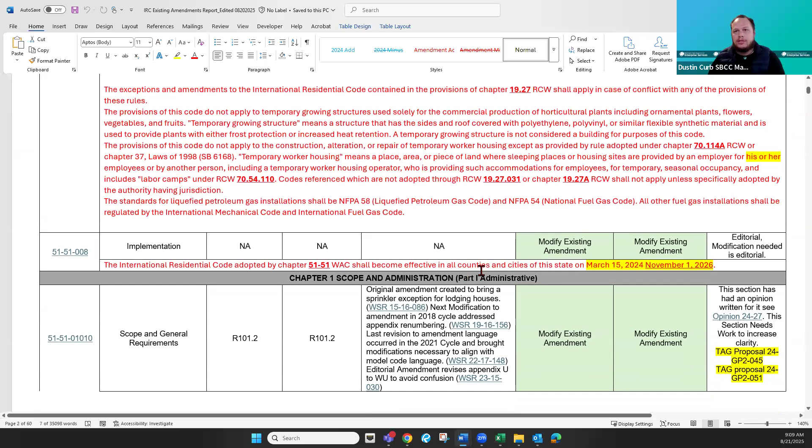I've also tried to go through and make sure that these aren't breaking across the pages. This is a section that didn't quite work out on that one, but I've tried to get that. There might be a lot of white spaces in here as we try to keep things together on these pages, and it looks like stuff I've done on this one down lower has messed it up above. So I will try to clean that up a little bit more when we finalize this.

Getting to section 101.2, we have two tag proposals on this one. One is to clarify that section 2904, and then we have another tag proposal looking at the exceptions for section 101.2. We have a lot of discussion on the daycare.

Our state amendment actually mainly lies right here in number 3, and all the rest of these are model code language sections that have some state amendment to them, but we have some discussion on this number 6. So the other proposal is going to really address the daycare facility exception there.

And at any point, if anybody—I don't have the hands right in front of me—but if you have anything you'd like to say, just speak on up. I'm happy to pause. We get to 102.5.

In this one, we have the tag proposal 045, which is again the number, or section 2904 proposal.

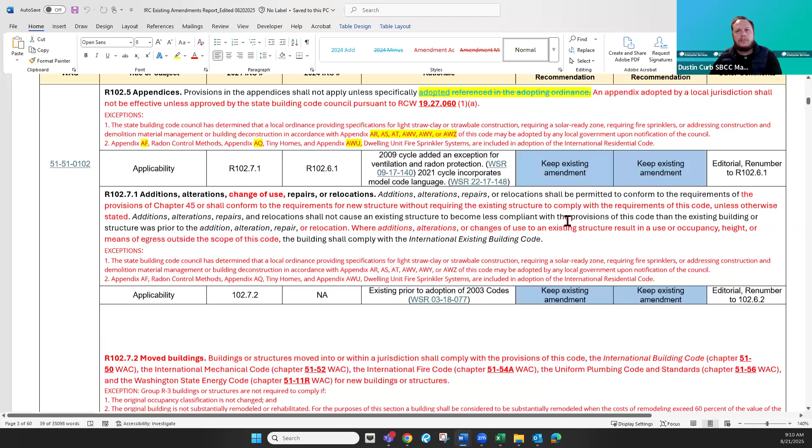For this section, we have a recommendation to repeal the amendment for egress roof access window that's contained in the proposal for number 046, which is addressing sleeping lofts versus lofts.

And the model code has moved to sleeping lofts, and the discussion is to maintain just loft language in Washington. Similar for the definition of landing platform, we have the proposal 046 in there, and the definition for loft.

We'll see this one pop up again in the significant changes report, modifying the definition or striking the definition of sleeping loft to go back to what we have currently here with a little bit of an update.

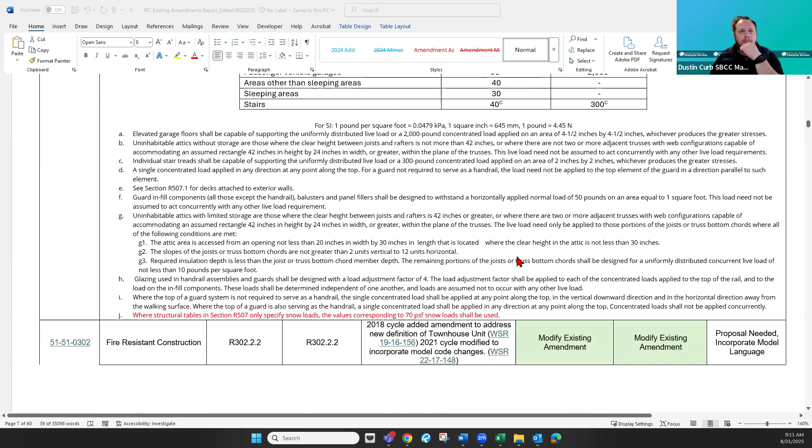And we have two-family dwellings. We have a separate proposal for that to kind of clarify how this one breaks into some new sections in the 2024 model code. So we have proposal 047 coming in for that one.

And that's relevant to all of section 302.3. They have a new big section in there.

And even though we're not proposing any changes on 302.34 with the proposal, since it's relevant to the topic, I've just got it listed in here because the section is included in the text of the proposal, even though there's no change proposed.

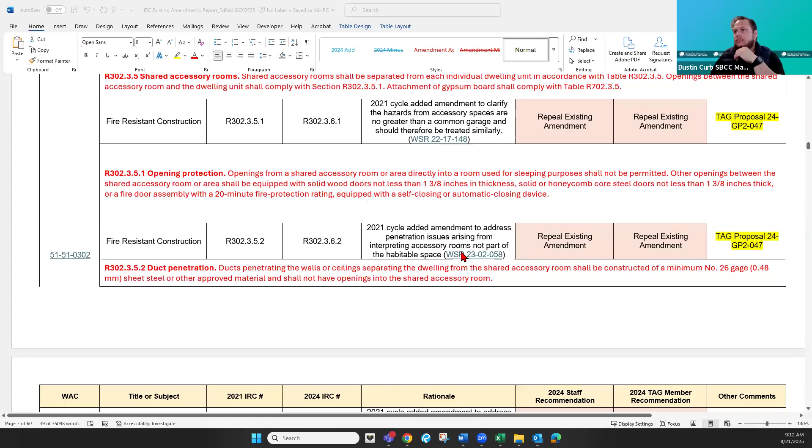This one is 045. This is related to the section 2904 proposal, mainly just cleaning up some stuff in here with the reference to the appendix and referencing correct sections for this section.

And this one, natural light, had a big revision in the 2024 model code, and our state amendment needed some work on that one to make it line up and keep the content while also aligning with the new model code language. So proposal 044 is the one we have slotted in for that one, and it's relevant to all of section 325 in the 2024 code.

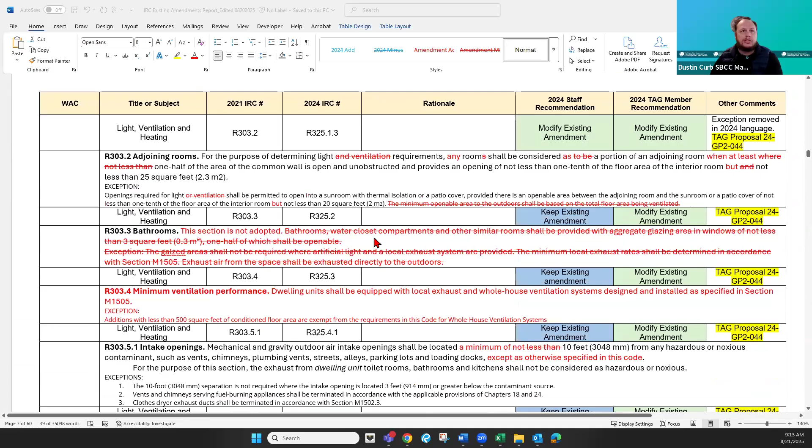And it's listed in here for all of the sections 303 in the 21 code existing amendments.

All right, for garages and carports, we have proposal 049, which is expected for the electric vehicle charging infrastructure components of these sections. So we have that one slotted in here.

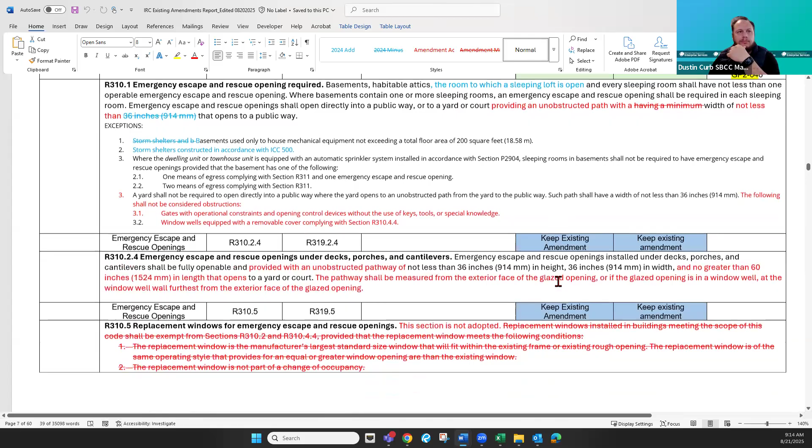The emergency escape and rescue openings, 046, is relevant to the sleeping lofts we were talking about earlier. Same for guards and window fall protection, we have 046 dealing with the sleeping lofts.

Same here for the smoke alarms and heat detection location section.

For this one, solar, let me just make sure I remember specifically what all's in 038. Give me two moments here. But that is a tag proposal. Number 038 - oh sorry, we have that one came in from the public, but I wanted to make sure I noted it here.

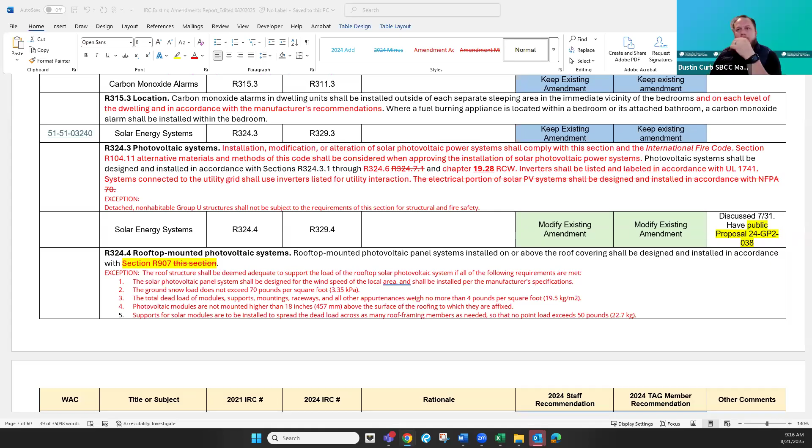We had some discussion on this one, so it's not a tag proposal highlighted there, and I didn't go through and highlight all the places where we have public proposals for existing amendments. That one was discussed at our last meeting briefly, and it was on my mind when I highlighted that.

John, go ahead. Just wanting to see if we're going to be discussing that today, and should we have our folks on here that can speak to it?

Don't anticipate having any robust discussion on the proposals today. The main goal of today is to move this report we're reviewing across the finish line, and then the significant changes report, we try to move that one as close to the finish line as possible. So as far as making or taking any action on the proposals today, that's not anticipated.

The reason I have the proposal list on there for other business is just to touch it if we see anything we need to address before next week's meetings. Gotcha, thanks Dustin. No problem, John. Thank you.

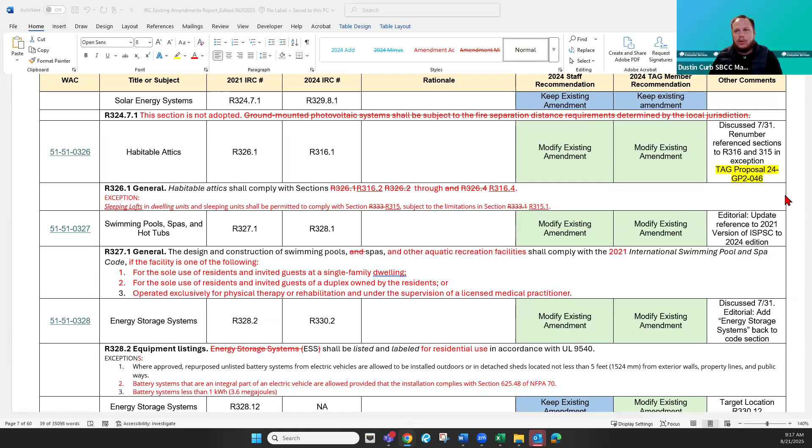This 046 is for the sleeping lofts in habitable attics. We have our sleeping loft section, so proposal 046 will be applicable to all of these sections, and IRC 2021-333 and section 315 in the 2024 code.

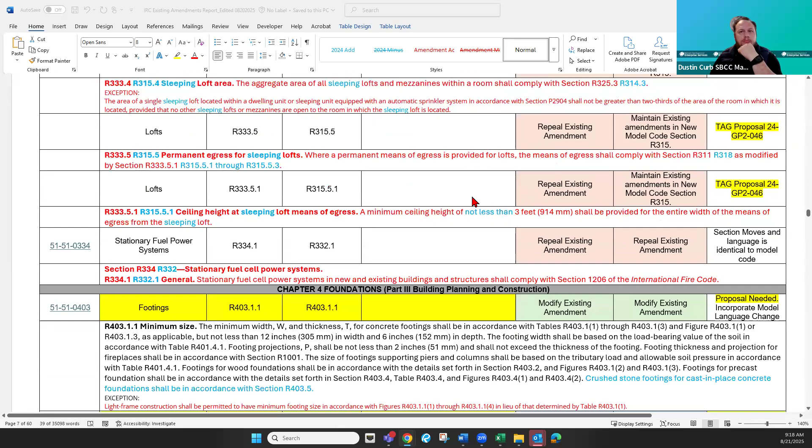So getting here, these are the highlighted blocks that I had marked for additional discussion. Let me go back here.

So this is the section, I think, Josh, that you said there were some issues that you guys were discussing or had some issues with in your work over the last weeks. The notes I had on here...

...was to incorporate the model code language, and a proposal's needed to do that to our state amendment. I'm happy to write that because it's fairly editorial, and I think it also reduces costs based on the information provided from ICC on the change there. It allows a little bit more flexibility in what goes on underneath the footings.

And I wanted to pause and talk about this section - if we can write a proposal, or I'm happy to write a proposal to propose adding crushed stone footings for cast in place concrete. Any thoughts on that? Josh, go ahead.

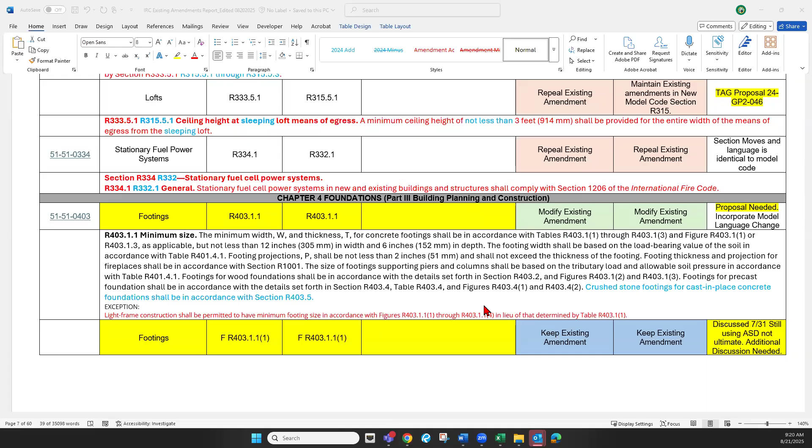I think it makes perfect sense to incorporate the model language, and the portion I was talking about is actually the very next one, 403.1.1 parentheses one. Okay, but I would be happy to write a proposal if no one else can. It seems pretty straightforward. Gotcha.

I'm going to unhighlight this one, and I'll write a proposal for this to incorporate the model code language. I'll be using economic data that comes from ICC. There's not a ton in their CDP access stuff, but what is there, I'll bring into the proposal and add to the bottom of our list.

Go ahead, Patrick. Yeah Dustin, you mentioned economic data - would this have an economic impact? According to what was viewed on the ICC code development access information, the addition of bringing in crushed stone footings...

...will reduce construction costs because it adds a lower cost option for certain scenarios. So it's not adding cost, it's reducing, but the information in those proposal documents for ICC is what I would intend to bring to this one.

And they don't have any specific real numbers, just a kind of statement of what's going on, but I'll sift through that one and bring it forward.

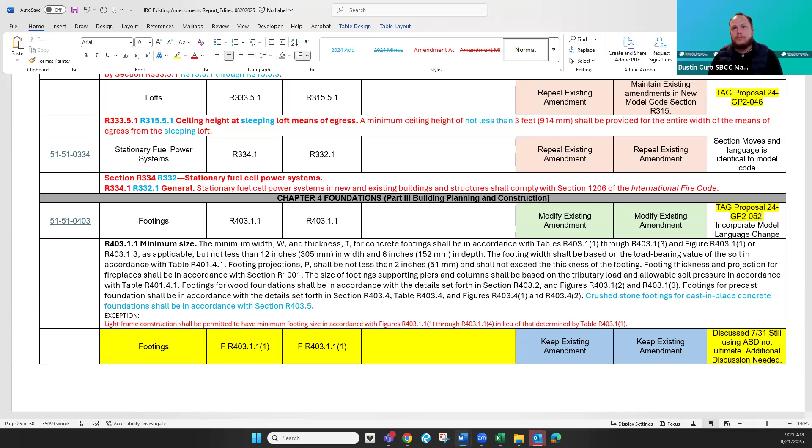Alrighty, so this one - any of these other ones highlighted in chapter 4, which is pretty much, I got chapter 4 and chapter 5 stuff that I had notated for additional discussion, primarily focusing on if there's any snow loading changes that need to happen here.

The question I had in my notes was, is this still using the ASD versus the ultimate design? Looking back into chapter 3 of the 2024 IRC, they're still using the ASD design. So I just have these highlighted as they had potential snow loading issues, and I wanted to make sure we don't need anything additional in these sections as we move forward.

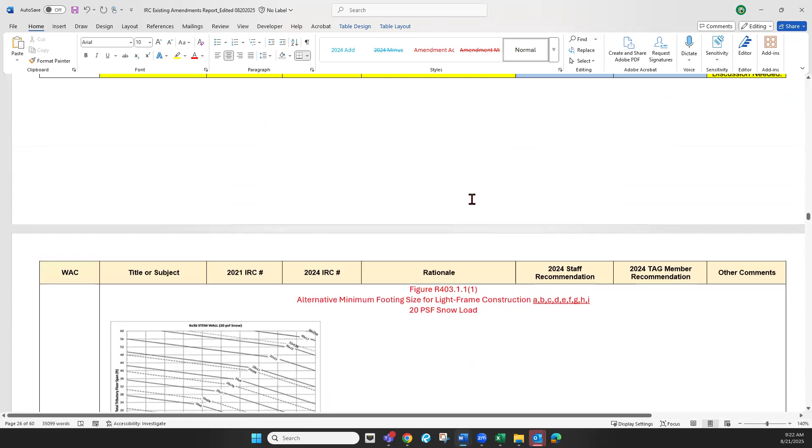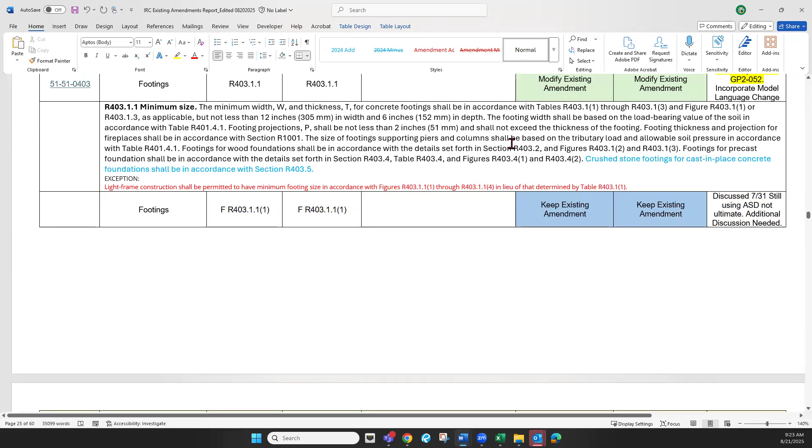So, Josh, you said we might need to look at these figures below a little bit. Yeah, as it relates to the ASD and LRFD, I concur with you. I don't think there's anything we need to do because the IRC is still using ASD loads. It has language about the conversion, and we wanted to wait till we saw some of these other proposals. We did see some from SEAW, and they were adding clarification to the table, giving us more options, not trying to move away from an ASD snow approach. So everything is still proposed and adopted as ASD snow. I think we're plenty good there, unless others have other thoughts.

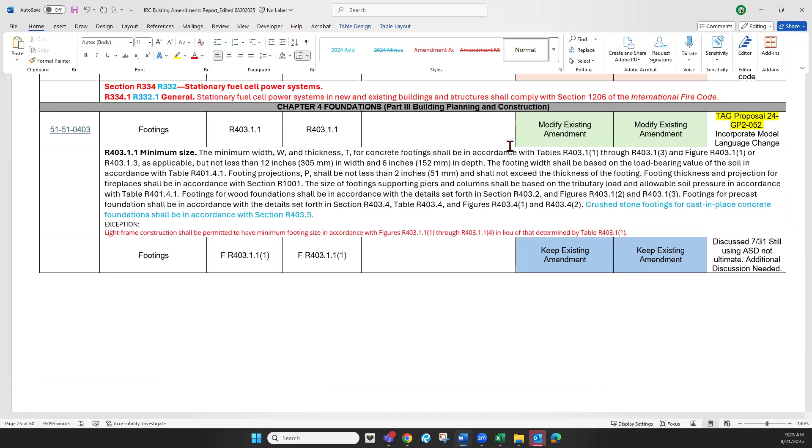My comment actually came up this morning on a project relates to the terminology we use. It says tributary span in the table, and this is a table replacing a table from the IRC, or an acceptable exception. But the table in the IRC uses full span of the building, or building width. In typical engineering terms, it's much more common to hear tributary width as opposed to tributary span - it can be interpreted two different directions. Based on back figuring the numbers, they were looking at tributary width, not tributary span. If somebody were to misinterpret this, they would be very conservative.

So it's not an urgent issue, but it was brought to my attention and there was some confusion about it. I back figured the numbers, and I do see where confusion can come up with that terminology, especially considering the table it's replacing. I'm hoping maybe somebody on the call happened to be involved in this at some point. I'd love to hear if there's anything else I'm missing, but it seems pretty cut and dry to me that the intent was a tributary width, or half of the span, not a tributary span. Does anyone else see that as an issue, or am I just odd?

Or are there other structural folks on the call today, or maybe I'm the only one?

So just so I'm tracking, it's just changing span to width, and the tributary width is similar to span, but not the same thing. I'm hearing the difference there, but what is the misconception that happens when someone uses width versus span? So the tributary width is half of a span. I've never heard the term tributary span before - that seems like almost an oxymoron. You're either a span or you're the tributary width, not a tributary span.

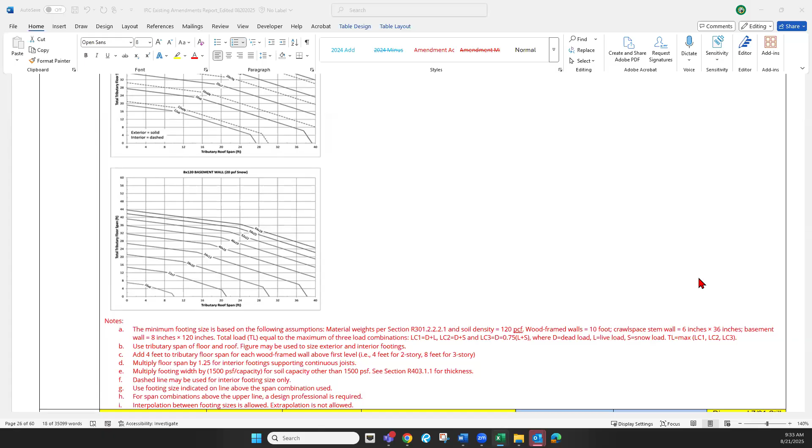My hope was that we could approve the report today, but I guess we have this and then that other proposal that Dustin mentioned. Is it possible we could tag the proposal as TBD and approve or take a vote on the report today, and then when we have proposal numbers for those, if they get it by tomorrow, we can get numbers for them?

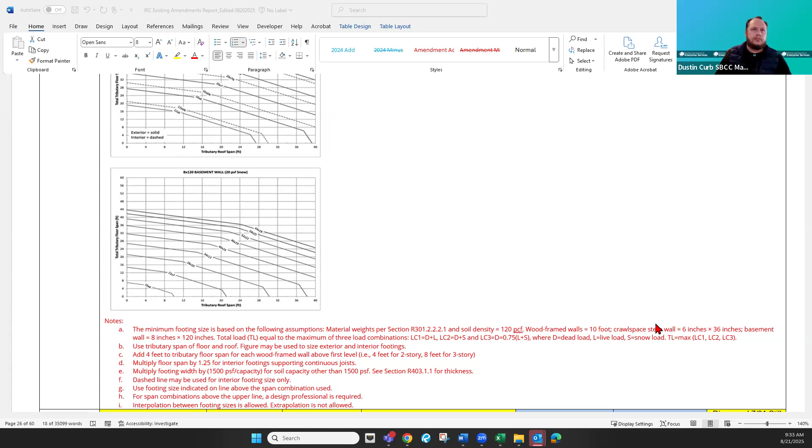So my thought is I'm prepared to pop a proposal number into this right now, as you saw me do on the one above earlier. And I can do another one for this one as well. Sounds good. Okay.

Moving on. So everything highlighted in here moving forward is just the snow discussion. Josh, is the proposal you'll be looking at going to cover all of these 403.1.1 figures? Yes. Okay.

And the whole ASD, LRFD snow thing is no longer something we need to hang on to now that we've seen all the other proposals. Okay.

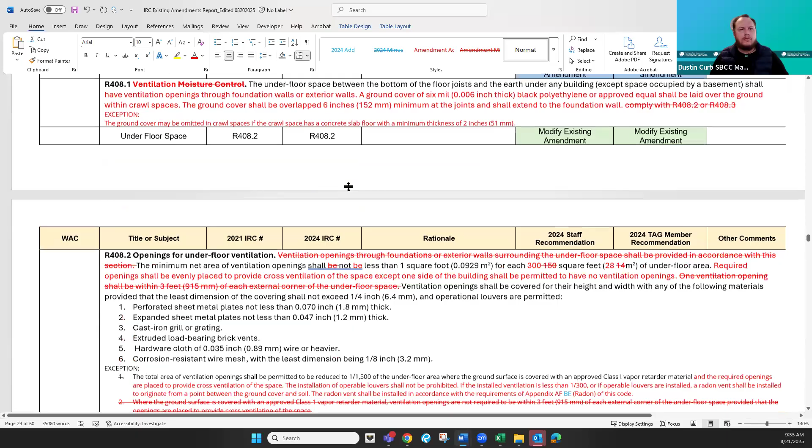Moving out of the 403.1.1, the next stuff I have here as far as additional discussion is in 507 for similar stuff. Would we say that I just have it on here, that it may need to be visited due to snow load revision? Still, I guess the sentiment I'm hearing now is that it's no longer an issue.

That's correct, because the tables still give you an ASD snow load. The snow loads may change in some locations, but the tables still give us the right values. And because we aren't doing anything to change the IRC values to LRFD, those tables are still valid. Gotcha.

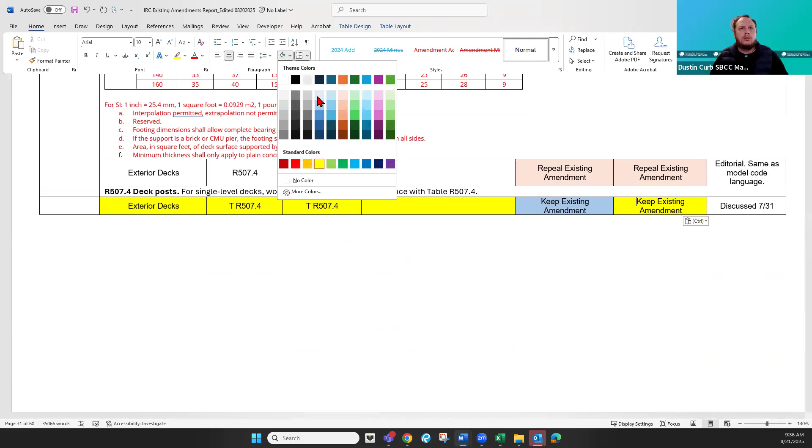Same on this one. This is the last one. Thanks for setting those aside, Dustin. Sorry to make you do so much editing. It's okay.

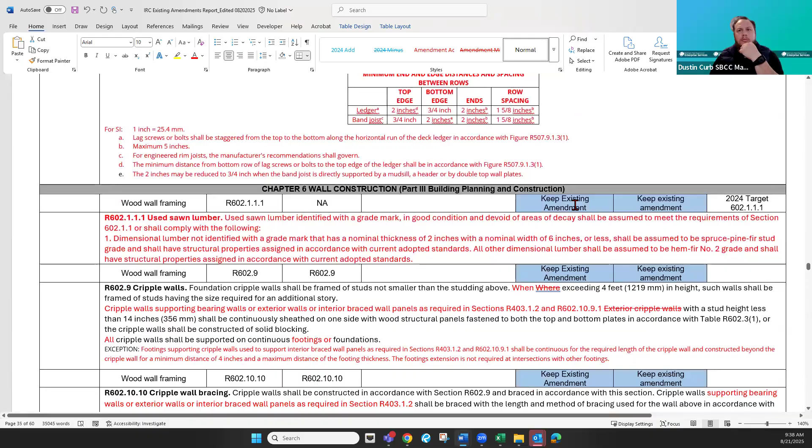All right, moving forward. I think there's a lot of just scrolling through the middle of the report. This one,

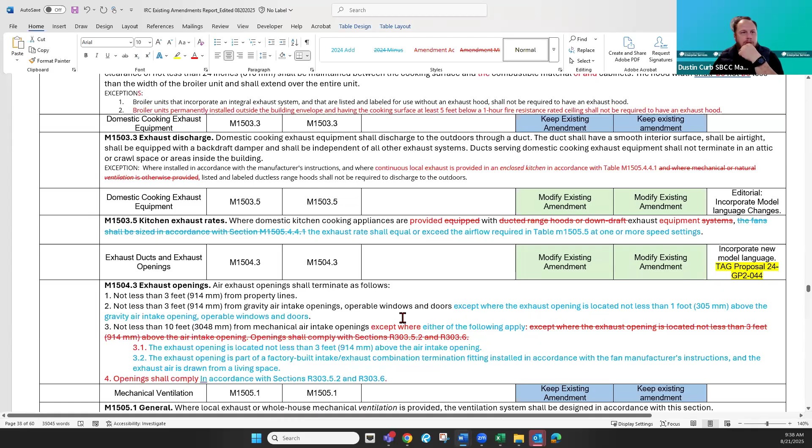M1504.3, 24-GP2-044, is on the ventilation and heating. I don't think they're actually proposing any changes in this section, just that it could be relevant here. So I have it in there because it's in the content of the document we were looking at. I don't have the official proposal for that one just yet.

This is the 2904.1.1. So we have a proposal on that one.

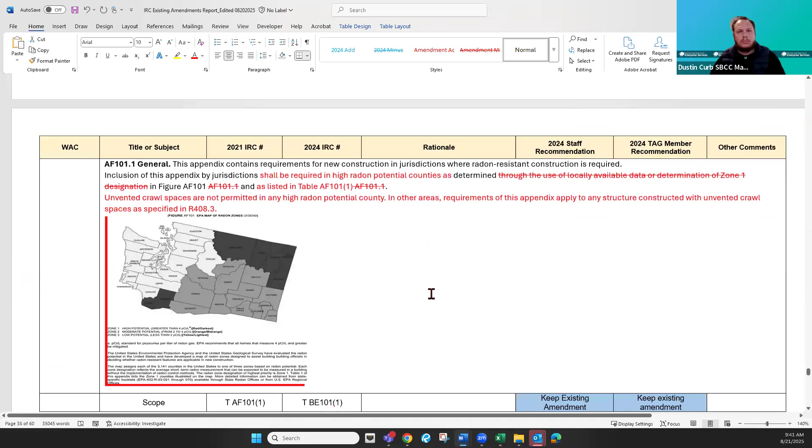We get to the appendix on tiny houses. We have a separate proposal. This kind of goes hand in hand with the sleeping loft topic, but we're going to be looking for a separate proposal on appendix BB for the 2024 code.

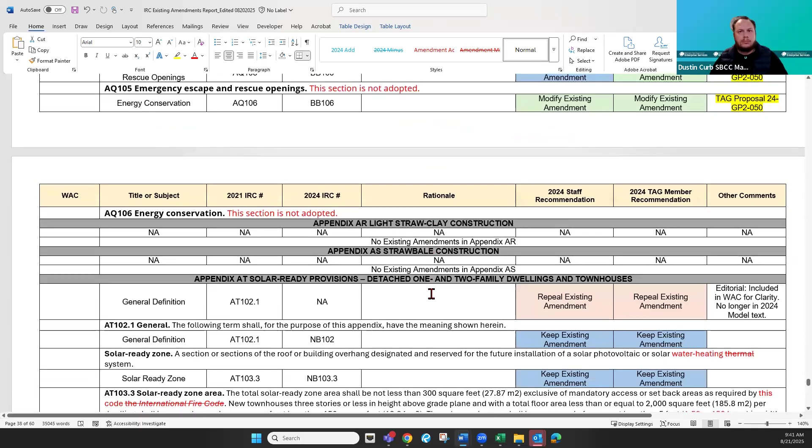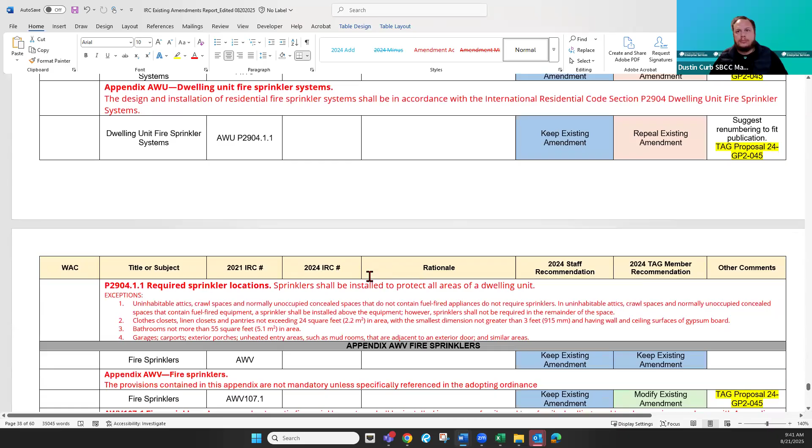And then this is the 2904 specific proposal. Again, looking to make some modifications in this one, and that proposal is recommending to repeal the amendments here and pretty much strike the appendix. And then there'll be a modification to the AWV appendix made by the proposal for the 2904.

And that, everybody, is the end of the report. Are there any specific sections anybody would like to go back to and rehash, or are we in a position for a motion on this one?

Patrick: I'll move to approve as amended. Seconded by Josh, or whomever. Okay, so we have a motion and a second. Any discussion? Not seeing any hands. Let's go to a vote.

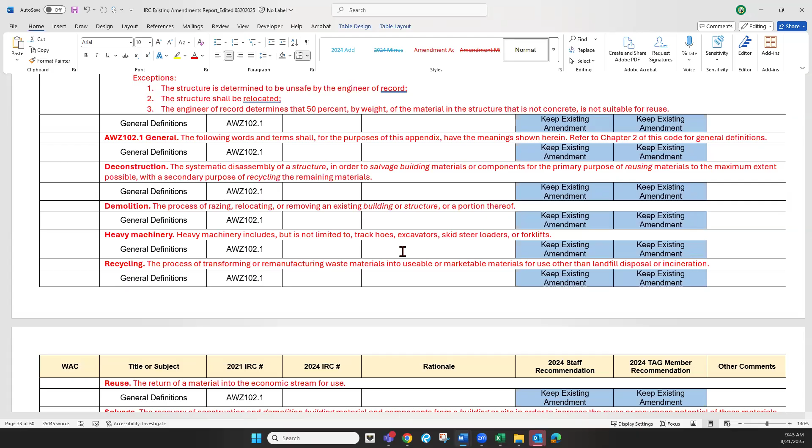All in favor, please say aye. Aye. Aye. Aye. Any opposed? Hearing none, motion passes. Awesome. Thanks, everybody.

And we're going to move to, what's the next one there, the significant changes report. Yeah. All right, so that is saved.

And getting into the significant changes report, let me just clean up my screens, make sure I don't have too much open. So I'll bog down real quick. Accidentally clicked the wrong document.

All right, so this report grew quite a bit in the time since this group last viewed it. The main growth is in the appendices. There was an ask to bring in the significant changes more to the new appendices, but I went ahead and included all the significant changes in the other existing appendices as well.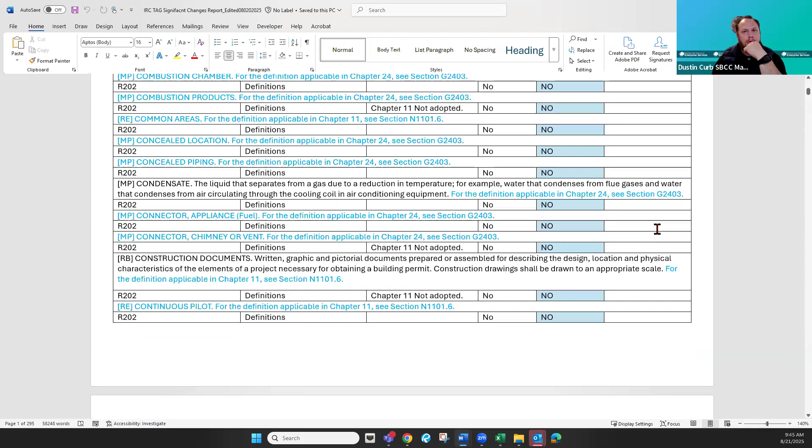Got a little one here for sleeping loft.

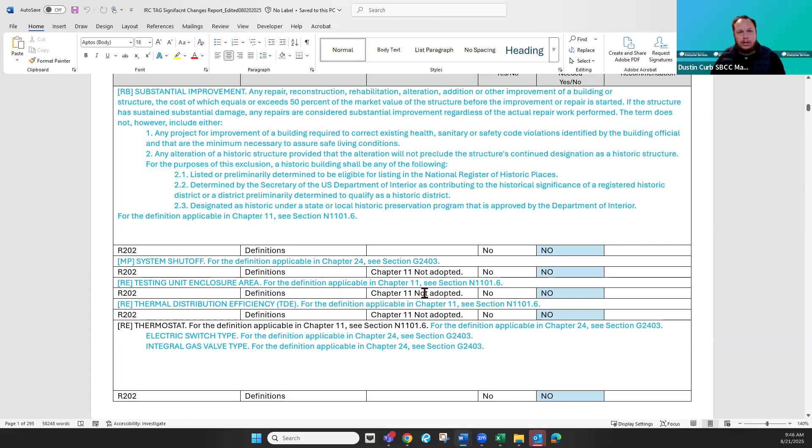The other change I glossed over was the recommendations for amending Chapter 11 stuff out of the code. We discussed not doing that, so the recommendations, mainly in the definitions, have changed to not strike the Chapter 11 references. There was a lot of amendment needed in this chapter the last time we looked at this.

We're into chapter 3. A lot of tables. Here's the seismic design map that was included here. The one with the X on it is the 2021, and this one here is the 2024 version.

They didn't have this little designator included in the snip I was doing, but the shading is slightly different, so I wanted to make sure it's relevant that this isn't a reduction over here. It's still E, but there's just more of it, and it doesn't look the same.

When I was running through doing this, it became a little bit confusing to my eye until I noticed the table here wasn't quite there. As a side note, the shading they've used for these charts is absolutely terrible. It is so hard to read, and it's so high level that it's hard to actually run through and look.

Josh: I was just going to point out it is very hard to read, and I believe they have it in the note in the bottom left. The official source is not the map - the map is just illustrative. You're supposed to get the values from the ASCE hazards tool that finds specific points.

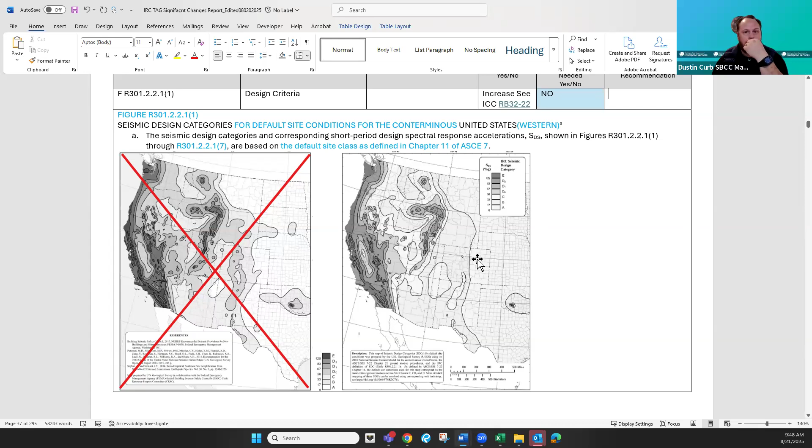Does this work for the group, showing the difference in the seismic, the illustrative differences? Seeing no objections, I will move on.

Some more reference tag proposals on the two-family dwelling for 302.3. We got 045 - this is for dwelling unit fire sprinkler systems.

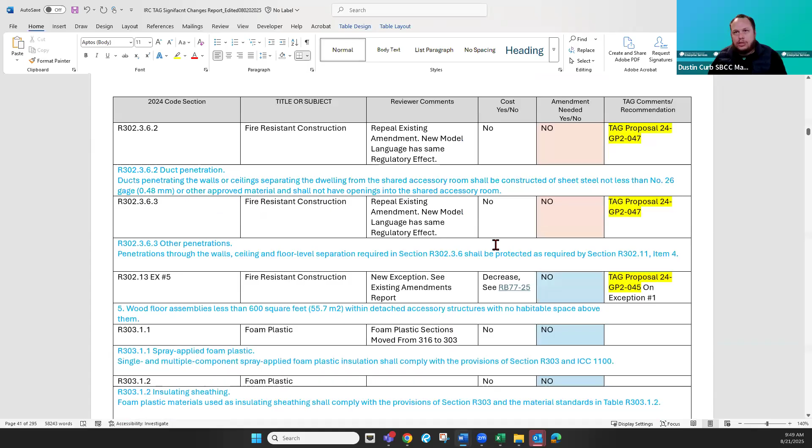Oh, 46 - this has got to do with the sleeping lofts, the sleeping loft section. A lot of this in here is to repeal the existing amendment to these sections because it's all been worked out and included in the model code, so we have the proposal there to do that.

046, still sleeping lofts. 048, care facilities - this one's an accessibility one that is not included on the existing amendments report. This is a new code section, just trying to make sure we're clear on the adult family home application there.

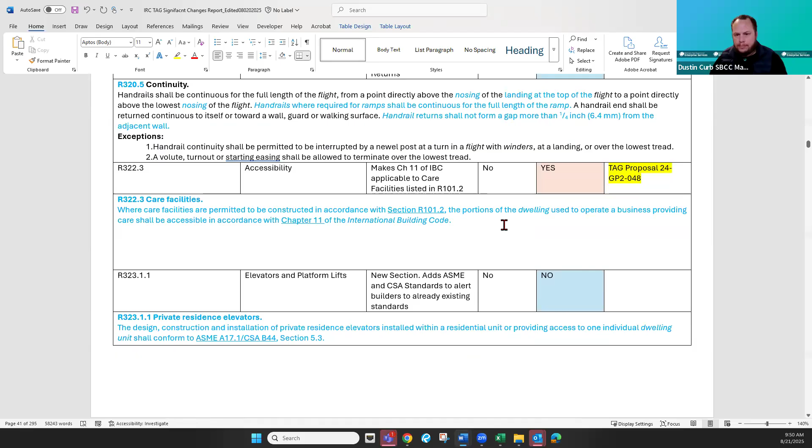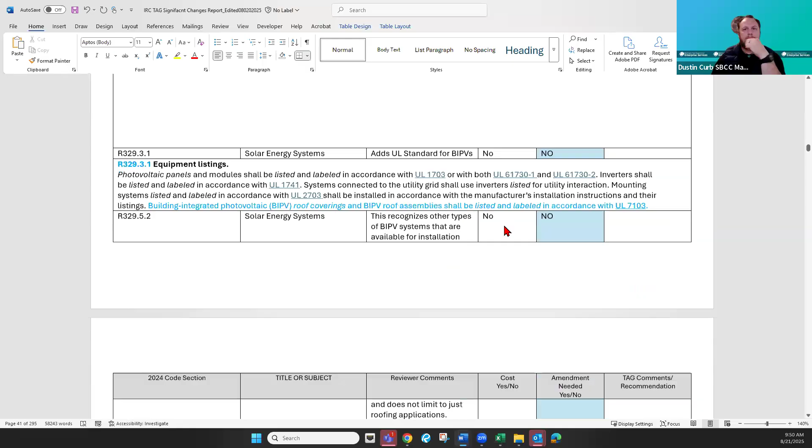Natural light section that got split up into some new stuff. With these big tables, it starts getting a little bit cumbersome to get these to break across the page appropriately, so apologies on all the white space.

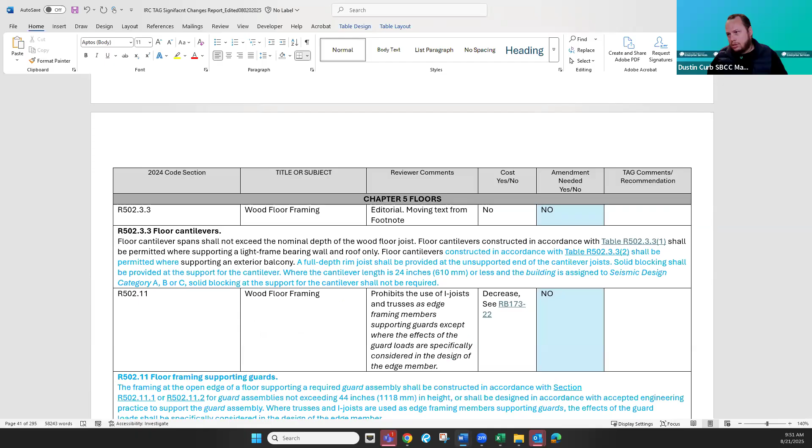Patrick: Sorry, it looks like we had a reference to the crushed stone footings thing - did we need to add in the proposal number for that? Yeah, that's a good point. Let's see, there's a crushed stone footing page back - it's gonna be 40311.

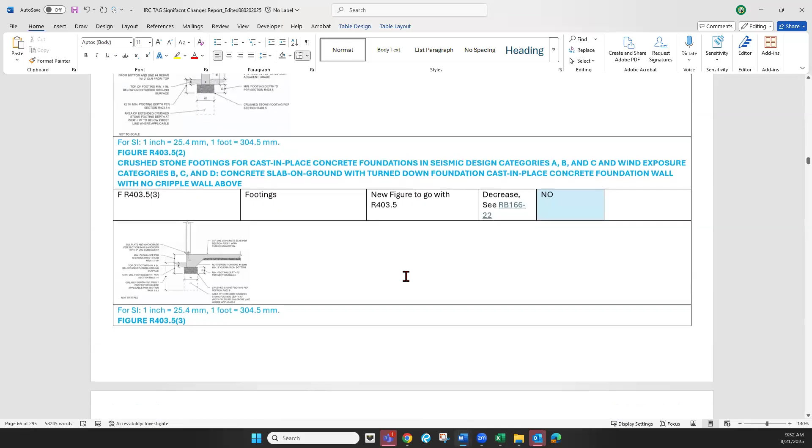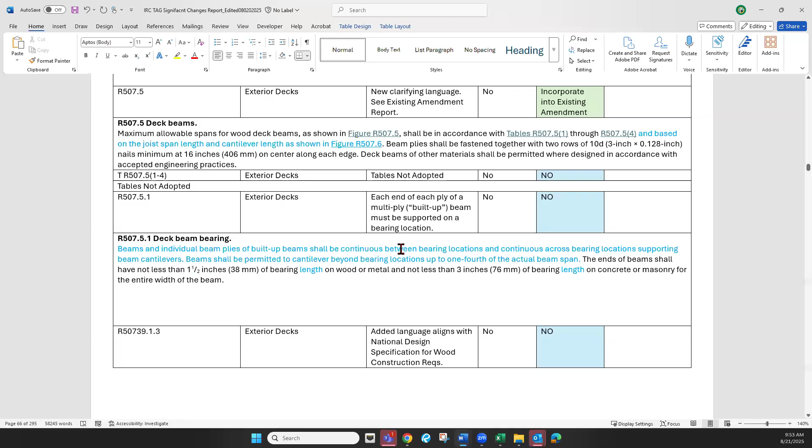Patrick, you said that tributary span was listed in chapter 6 as well. Josh, what are your thoughts on including that in the proposal you're bringing? I think it would be important to look at. I'll admit I haven't been able to juggle and look at that section yet, but I have it written down here, so I don't have an answer this moment, but I think it would be worth looking at, because if we're saying the term doesn't make sense there, it might not make sense elsewhere.

I've also tracked down the contact information for the gentleman who made the table, so I'm going to try to reach out to him today and see if I can't just have a quick conversation, make sure there's nothing I'm missing about it.

Awesome. Yeah, the references in the exception B for table R603.8 - it looks like it's in the model code language for the 2021. I have not checked the 2024 code.

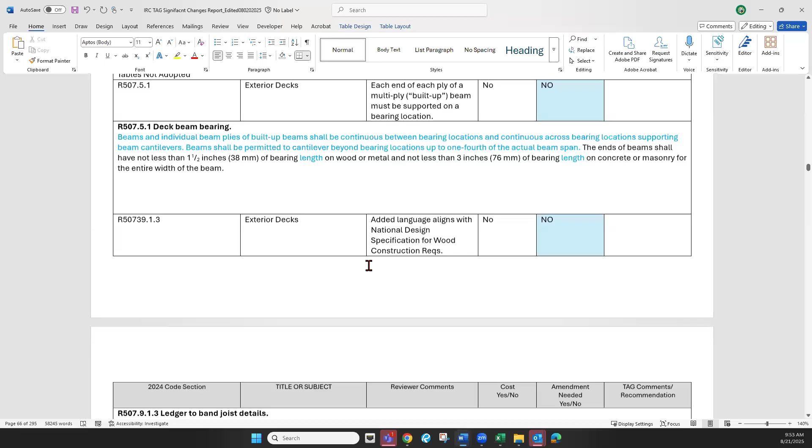So it's not a state amendment, but if we're changing the definition in one spot, we need to change it somewhere else. I think that's fine for the proposal and it doesn't need to necessarily be in either report. But thank you, Patrick, for bringing all that up. I will chase down and make sure there isn't a definition somewhere for tributary span that I'm not aware of. I didn't see it in chapter 2, but I'll verify all this because this was kind of a scramble before the meeting, having talked to somebody and having this confusion come up. So I'm less prepared than I would like to be.

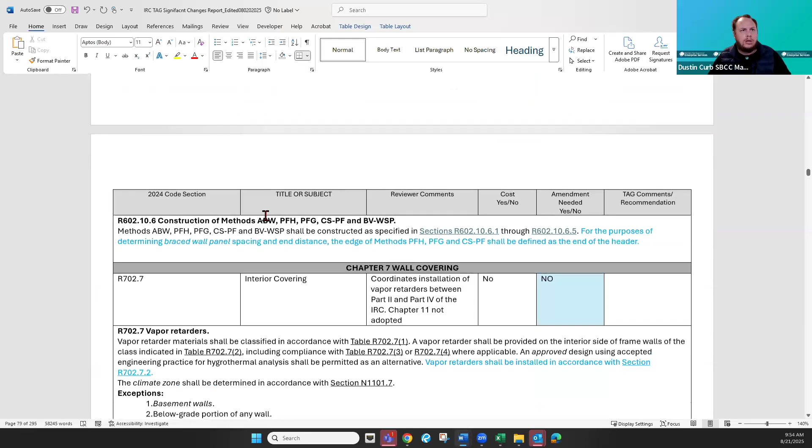Chapter 6, so it's not included in the significant changes report. And correct me, I don't think we have an existing amendment to that section either. Is that accurate? That looks like there isn't one. So then we don't necessarily need to flag a proposal number for that section, is what I want to make sure we're covering. And I did pull it up in the 24 and it looks like it's the same. So that term is in model code language. Always fun when there's a term in one footnote in the whole code.

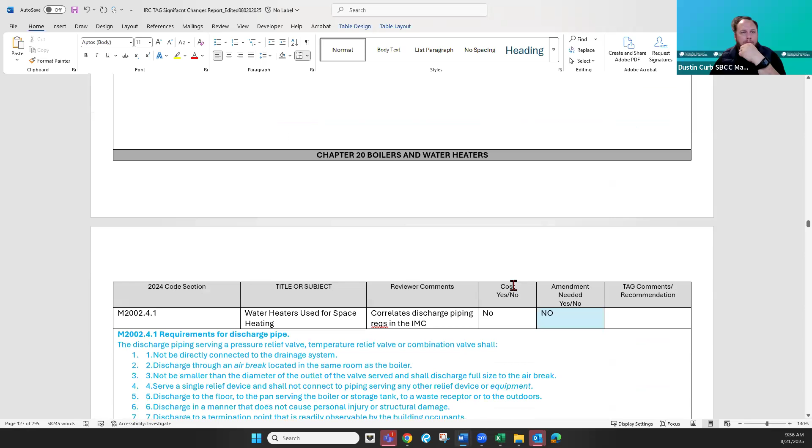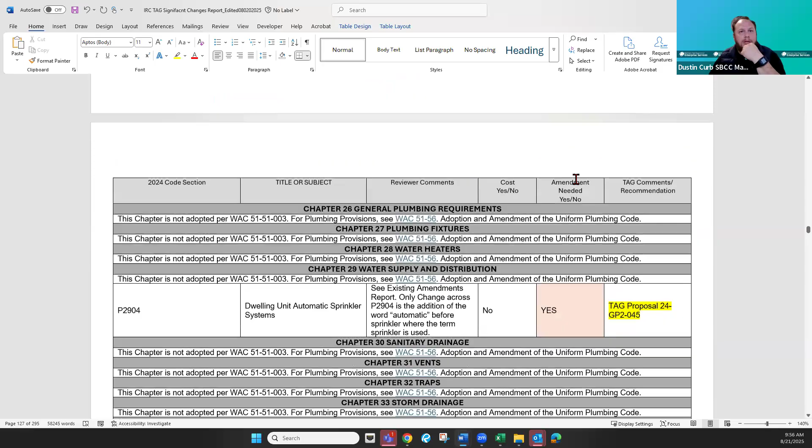All right, we get into chapter 29. We have a tag proposal for chapter 29. We have our referenced standards, a bunch of them. And then at the end of the reference standards section is the appendices, and that's essentially where we left off last time we were looking at this.

Okay, so changes here. I did a review of all the appendices. Appendix AA we don't adopt, and there's no significant changes within that appendix. Same thing for Appendix AB permit fees. Appendix AC is reserved, so there's no content. Appendix BA manufactured housing used as dwellings, it's not adopted and no significant changes observed.

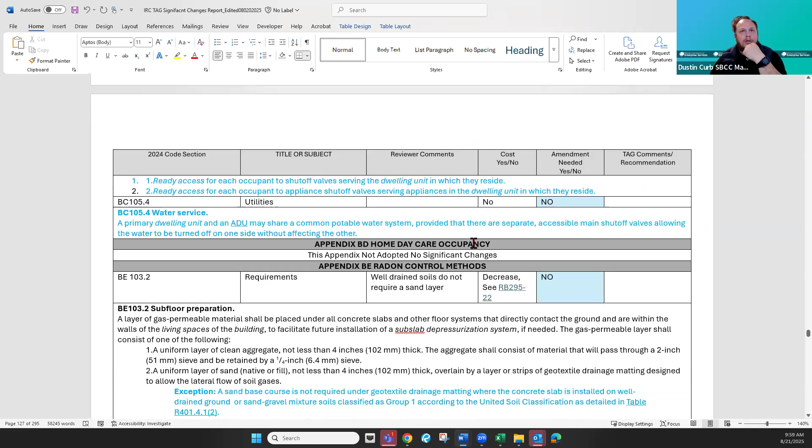For Appendix BD, home daycare, it's not adopted and contains no significant changes from 2021 to 24. Appendix BE radon control methods, we did review last time, and it has a couple changes in there, but we're not recommending to make any changes based on those.

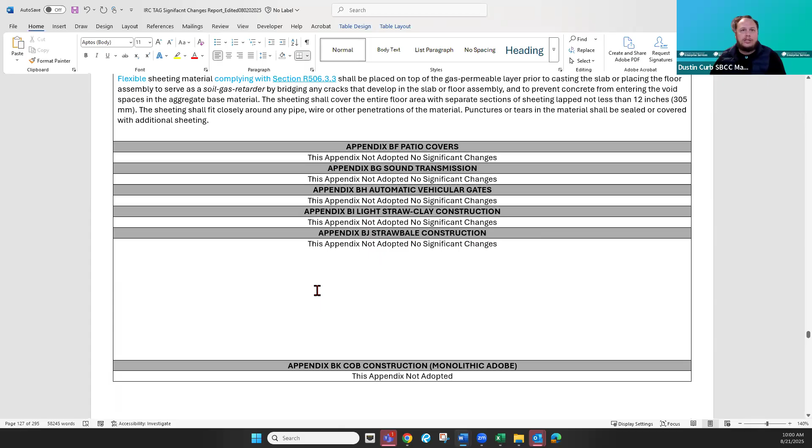Appendix BF patio covers is not adopted and contains no significant changes. Appendix BG sound transmission is not adopted and contains no significant changes. Appendix BH automatic vehicular gates is not adopted and contains no significant changes. Appendix BI light straw clay construction is not adopted and also contains no significant changes. Appendix BJ straw bale construction is not adopted and contains no significant changes. Appendix BK cob construction is not adopted, but does have a couple changes in it.

They add a definition for buck, and same for the other not adopted appendices. Since it's not adopted and we don't have any proposals to adopt it, the cost evaluation on this one is that the changes bring no cost to Washington, and we're not making any recommendations to modify or adopt this appendix.

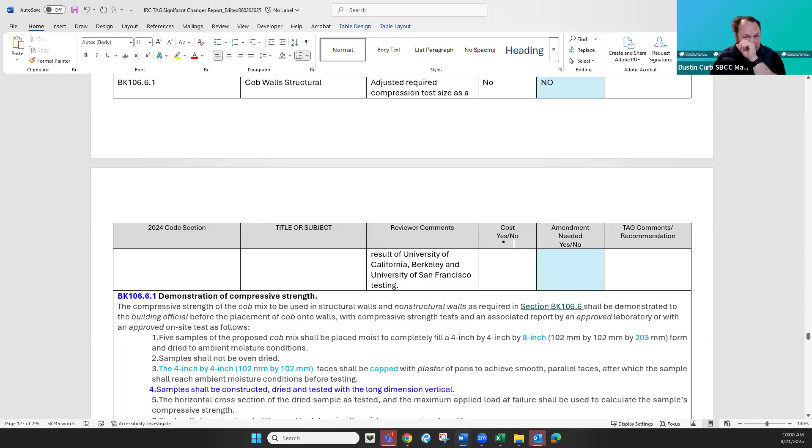Appendix BL hemp lime or hempcrete construction. It's a new appendix that is not adopted, well, hasn't had a chance to be adopted in Washington yet. Since it's not currently adopted and we don't have any proposals to adopt it, the cost is none, with no recommendation to adopt or amend.

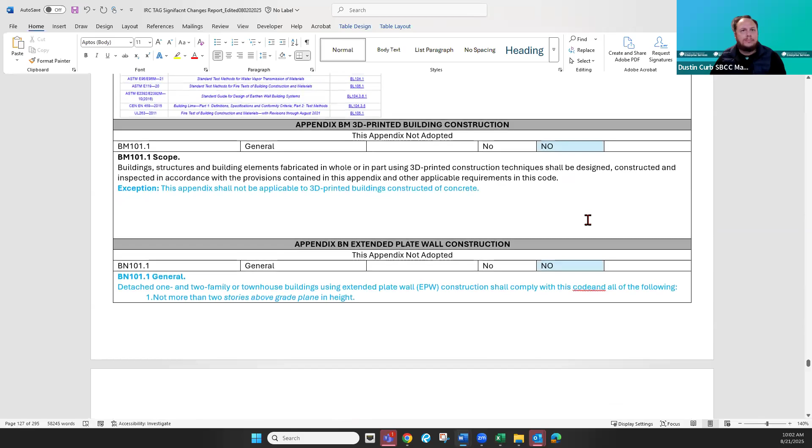Appendix BM 3D printed building construction is not adopted and has one small change in it. Cost is none, and recommendation to adopt or amend is no. Appendix BN... drawn on the screen, Ron.

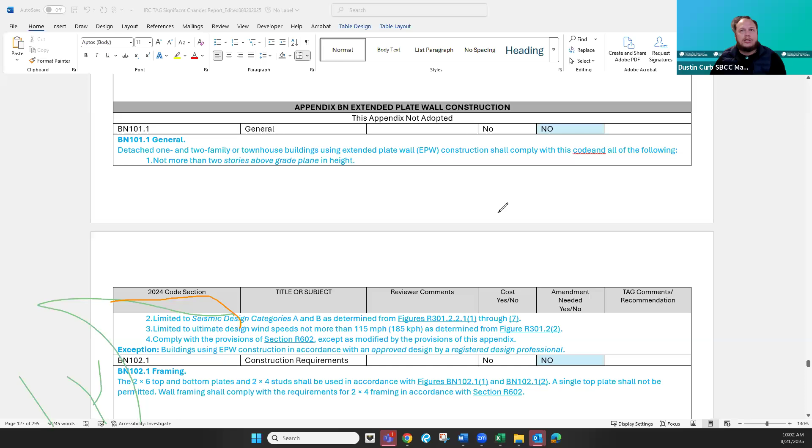Anyway, Appendix BN extended plate wall construction is not adopted, and cost is at none, with no recommendation to amend or adopt.

Appendix BO, existing buildings and structures, not adopted. Cost at none. Recommendation to amend or adopt is no.

Appendix CA, sizing and capacities of gas piping, is not adopted and contains no significant changes.

Appendix CB, sizing of venting systems serving appliances equipped with draft hoods, category 1 appliances and appliances listed for use with type B vents, is not adopted and contains no significant changes.

Appendix CC, recommended procedure for safety inspection of an existing appliance installation, is not adopted and contains no significant changes.

Appendix CD, piping standards for various applications, is not adopted and contains no significant changes.

Appendix CE, venting methods, is not adopted and contains no significant changes.

Appendix CF, sizing of water piping system, is not adopted and contains no significant changes.

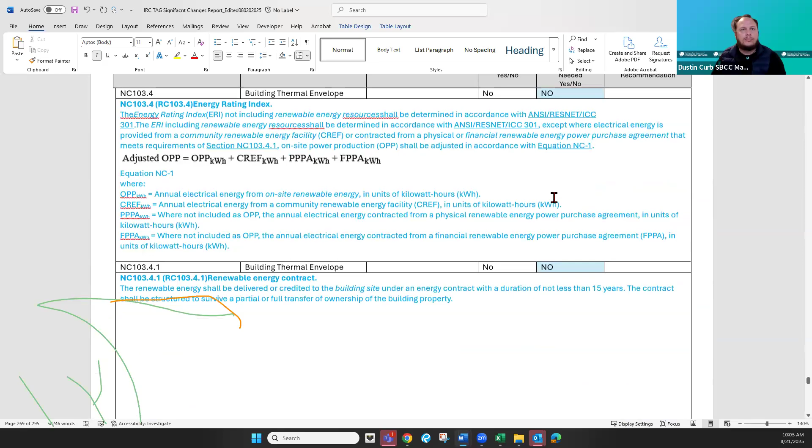Appendix ND, electrical energy storage provisions, is a new appendix and hasn't been adopted. Cost at none. Recommendation to adopt or amend is no.

Appendix NE, electric vehicle charging infrastructure, is a new appendix and is not adopted. The recommendation to adopt or amend is no, and cost for changes is none.

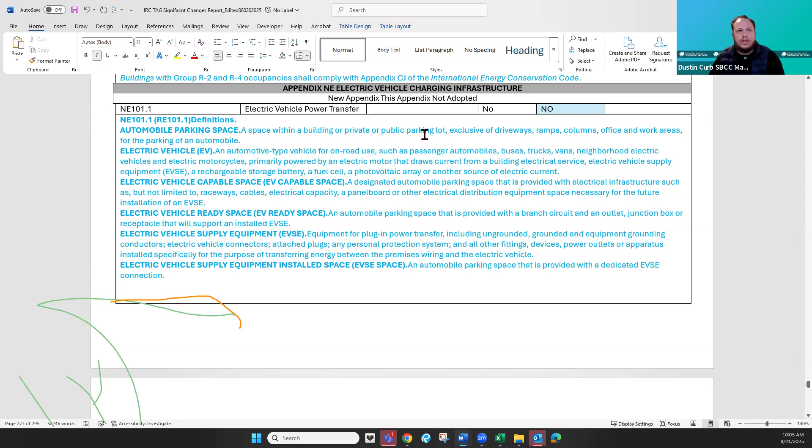Just curious, Patrick, did you guys use this one in the drafting of the proposal for Chapter 3 for the EV stuff? I think we brought in a definition. Have to pull it up.

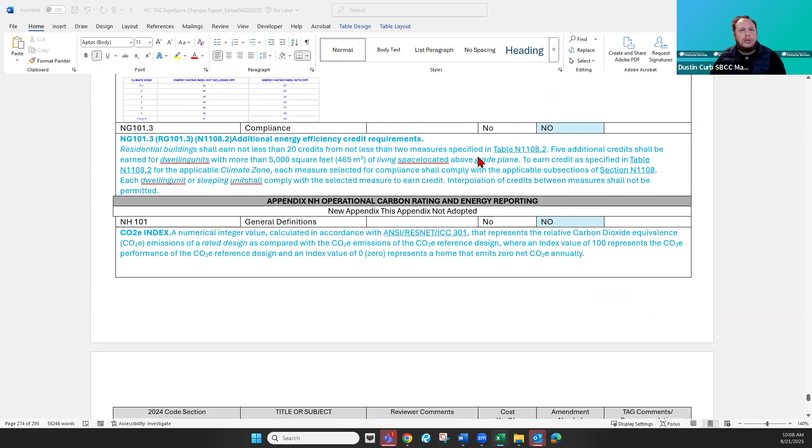Then we have Appendix NH, operational carbon rating and energy reporting, is a new appendix, not adopted. Cost at none. Recommendation to adopt or amend is no.

Appendix NI, on-site renewable energy, is not adopted. Change or cost for changes is none, and recommendation to adopt or amend is no.

Appendix NJ, demand responsive controls, is a new appendix. It's not adopted. Cost is none. Recommendations to adopt or amend this appendix is no.

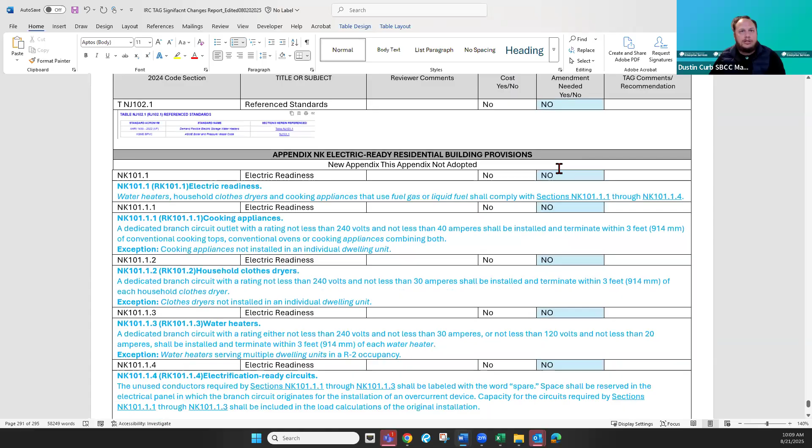Appendix NK, electric ready residential building provisions, is a new appendix which is not adopted. Cost is none. Recommendation to adopt or amend is no.

Appendix NL, renewable energy infrastructure, is a new appendix, not adopted. Cost is none. Recommendations to adopt or amend is no.

Is there any sections we should go back and look at in greater detail?

Go ahead, Patrick. I'll say thanks, Dustin, for adding in all that analysis on the appendices, and I'll move to approve this report as amended.

Okay, we have a motion on the floor. Do we have a second? I'll second. Thank you, Jonathan. So we have a motion with a second. Is there any further discussion?

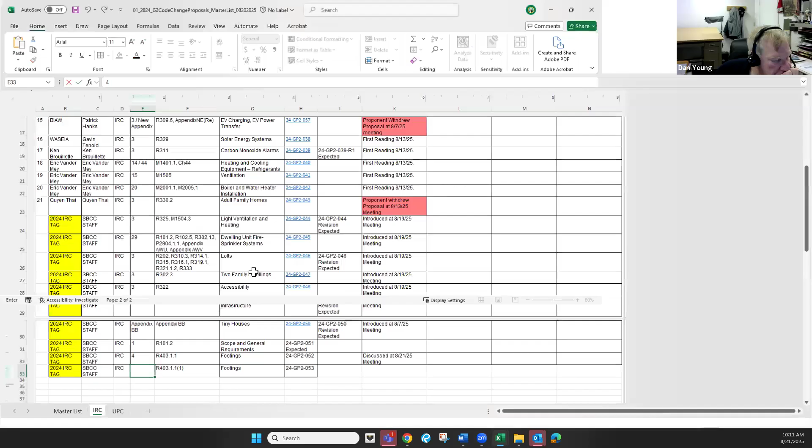The only item I posted, the proposals spreadsheet, to just have it up here as a potential topic to discuss. Notifications should have been received by folks who are expected to provide revisions in here. So I've got notes on here for revisions that are expected. The tag proposal revisions we're hoping to get in as well. I do need to send out additional communication on that to tag members for those proposals.

Changes made to this today are these bottom two lines here, where we added in the proposal I'm going to write up for section 403.1.1, incorporating the crushed stone footings language. And then Josh, I'm looking for a proposal from you on the 403.1.1 figures. So there's a need to add a little bit more in there.

But does anybody have any comments, questions, concerns with what we have on the proposals spreadsheet? Quinn?

Just really quickly, Micah texted me. He's not able to make it, it sounds like. But he's asking, are we getting rid of the requirements for sprinklers in the IRC scoping 101.2 for care facilities, as currently amended by WAC 51-51-0101? He was looking at the staff proposal from Dustin in the report. The changes match the 2024 base language, but don't show the Washington amendment we have now.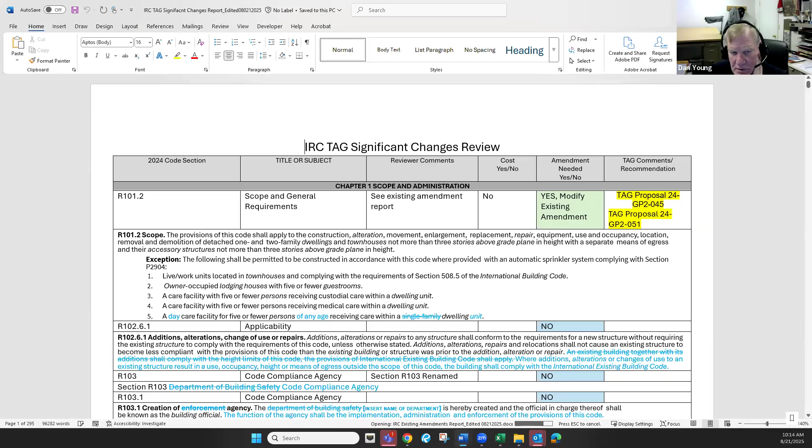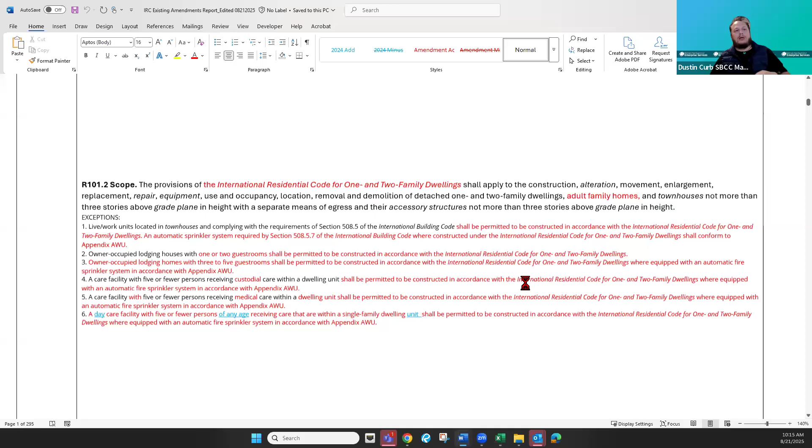So we have 'modify the existing amendment.' I don't think the intent is to strike any of that language. Okay, perfect, I think that's all he's asking for. Yeah, I think the proposal we have on these sections doesn't propose any of the changes he's worried about getting struck. We just need to make sure it's clear when the sprinklers apply versus don't apply. I think number 6 is where a lot of that sprinkler confusion is coming in for folks, since adult family homes with less than 7 beds don't require sprinkler systems. So we're trying to create clarity across this section and chapter 3 with your proposal, Quyen.

Perfect. All right, Patrick, go ahead. I was just going to ask if we can send a communication to all external petition proponents that we intend to meet Tuesday and Thursday and take final action on proposals. I believe one communication already went out. We did it for the ones we're expecting revisions on, but did we do it for everybody else? I believe so, and if it hasn't happened, we'll make sure it happens today.

Okay, I just want to make sure it's very clear that we'll be taking final action on all of that next week for those folks. I'll double check with Rosanna on that one.

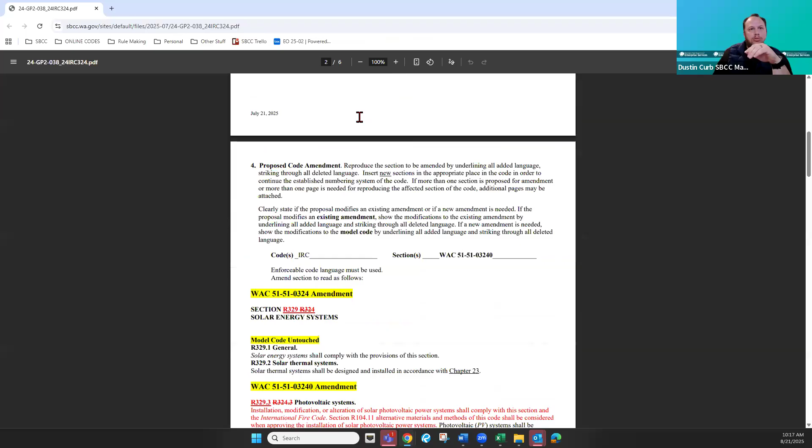So we have the solar energy systems, number 038. Let me pull that up and show you. So we have this one -- this is where the language you guys are proposing is contained at the moment. It's not in any report or draft code language just yet. Okay, understood, thank you so much. You're welcome.

All right, so just making sure we're notifying all proponents that we're trying to do final action at next week's meetings. Anything else on the proposal spreadsheet?

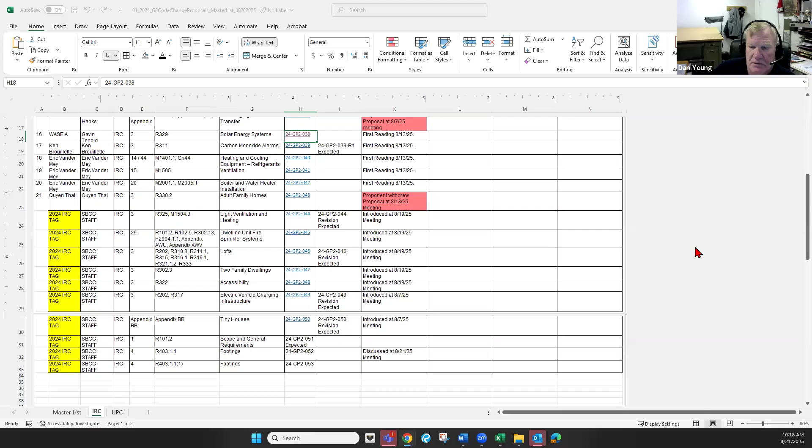I know we've all been putting a lot of hours on this, so it looks like we're going to get you at least an hour and a half back. Our next meeting will be Tuesday. Is that correct, Dustin? That is correct, from 9 till noon. In our first reading of all the proposals received so far by the public, we had some questions go out, so like Patrick was mentioning, we're expecting final action on most of the proposals come Tuesday, and hopefully we can clean it all up by Thursday next week.